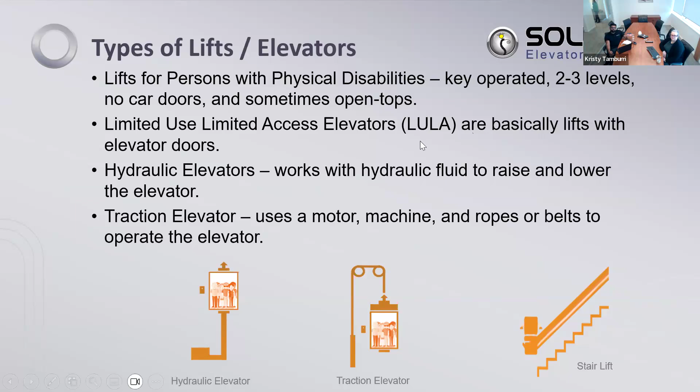The normal way we distinguish between the main types of elevators is passenger and freight. I know that probably in your buildings people use passenger elevators as freight elevators, but they're mainly supposed to be for passengers. Freight elevators you'll usually find in commercial buildings for moving deliveries, and they're not supposed to be for public use. Maybe one person in there for garbage and things like that.

One point I wanted to bring up is that for users and strata members, a lot of the time we have issues when people are moving in and moving out. You can ask your elevator contractor to provide some information, training, and keys to use the elevator on independent service. There's a key switch inside the car which allows you to take control of the elevator, rather than holding or propping the doors open. That's often an issue that causes callbacks and can shut the elevator down.

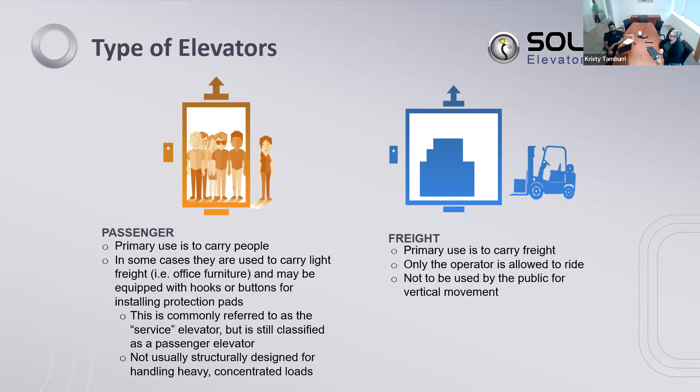In one of my last jobs, we reviewed all of our callbacks, and in Bermuda, 70% of our callbacks were related to doors. That can be down to wear and tear and the age of the equipment, but it is a part of the elevator which is subject to user interference and misuse. If there are ways to minimize these types of callbacks, it benefits everybody. So I think that's really important.

I feel like this is quite important because there are a lot of elevators coming to that age of modernization now, and with the type of applications and buildings that you have here, it will mainly be hydraulic elevators that you have. So this is important. I hope you enjoyed that nice animation.

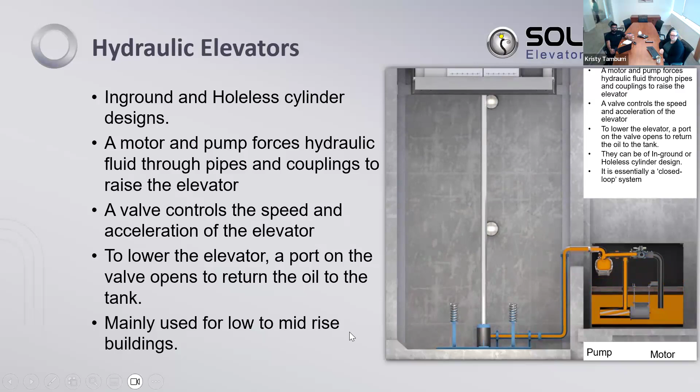Controllers. And this isn't just specific to a hydraulic elevator; we need one for all elevators, and the controller basically processes calls. It controls speeds, and you can adjust everything on there, and it monitors the safety circuit, so doors, door openings, safety circuits, and all of the switches, and keeps track of where the elevator is in the hoistway.

One point I wanted to bring up here is proprietary equipment versus non-proprietary equipment. This is really important to us as elevator consultants, because when you have proprietary equipment, not just controller equipment in general, it means that the software, the spare parts, and the equipment can only be sourced from one supplier. So it can become difficult when you're planning to modernize, or you have a breakdown and you need to get parts, and it can even tie you down to one provider.

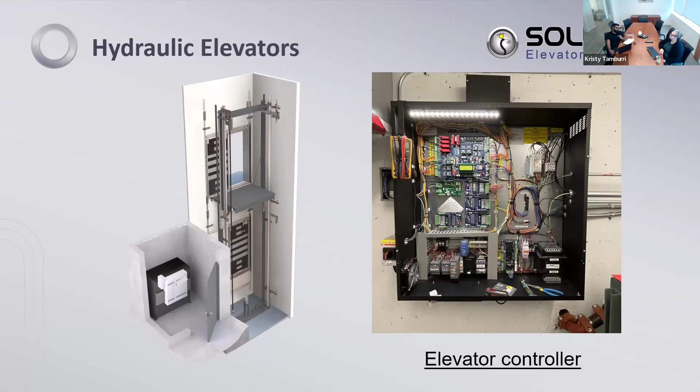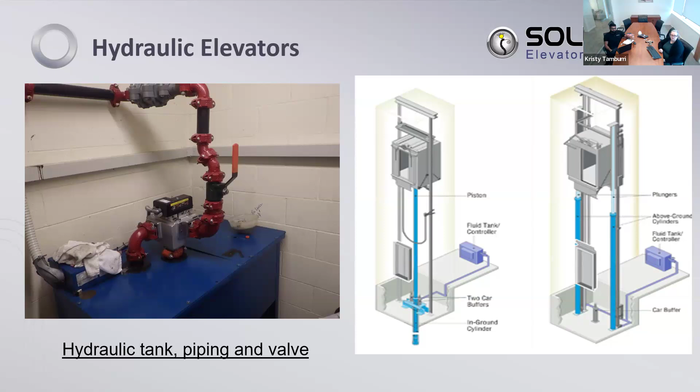Okay, done on elevator controllers. This is another nice photo of an elevator tank. Usually the power unit will be inside of there to pump the oil. And then on the right, we have a nice diagram again to show how the hydraulic elevator works and the in-ground cylinder. Something to be aware of is that oil leaks can be big issues, especially with aging hydraulic elevators. As you can see from the diagram on the right-hand side, there are lots of areas where oil can leak from. So I guess that's important to you guys, and that's pretty much all to say on this slide.

And then this is the cylinder. On the right-hand side, you can see how it's protected and it's in the ground there. They should have PVC casing to protect it. And that's the piston, obviously, that raises and lowers the car.

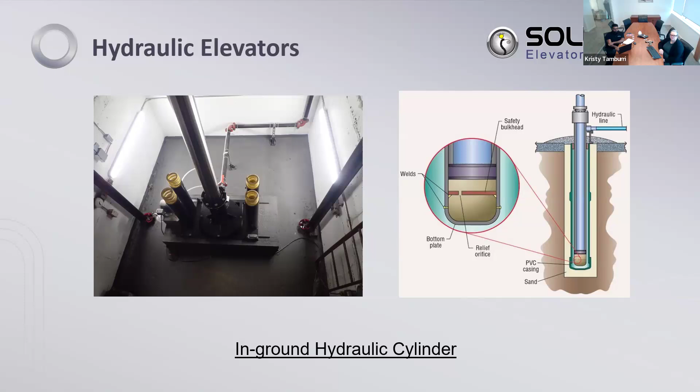Okay, now moving on to traction elevators. In comparison to hydraulic elevators, they're used for mid and high-rise applications. These are the three main versions: geared machines, gearless machines, and machine roomless applications, which have come in the last 25 years. Machine roomless, I'm not sure if anyone would have seen them before. It means, obviously from the name, that you don't need a machine room. Everything's in the hoistway for you.

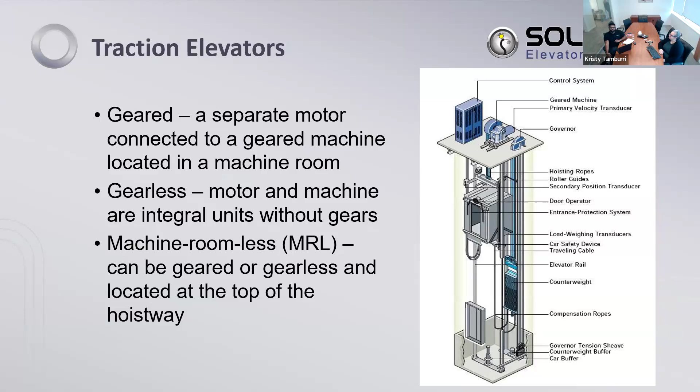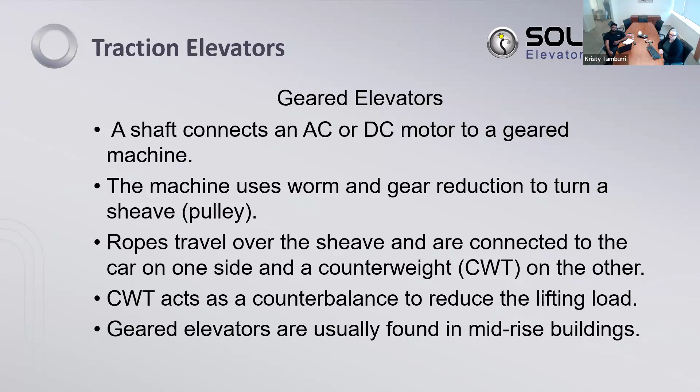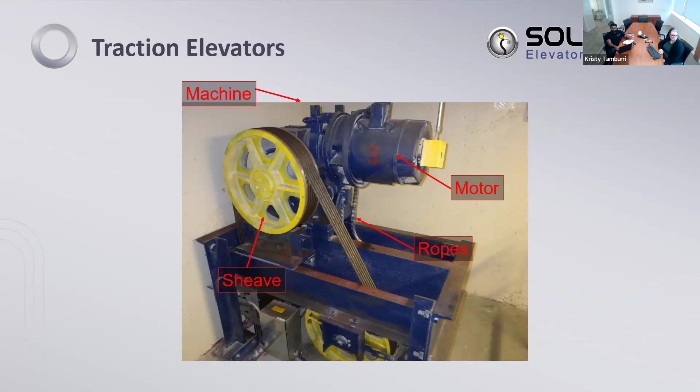This is a photo of a geared machine. And although it looks pretty simple, the type and manufacturer and components can affect how serviceable and upgradable the system is. So this is probably the simplest depiction of this machine. And a couple more lovely photos.

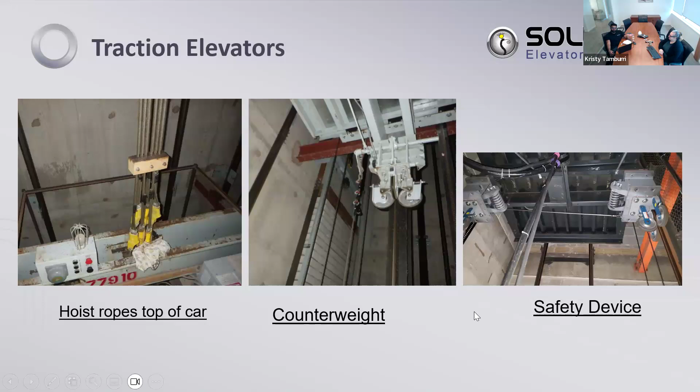So for gearless applications, the shaft connects to the motor directly. Ropes travel over the sheave and they're connected to the car on one side and the counterweight on the other. So it's same as the geared application. In this case, it's used in higher speed, higher rise applications, and the gearless elevators are more expensive, but they're smoother in ride. The ride quality is better. They're more efficient, energy wise as well. So it's a bigger initial investment, but for long term, they are better.

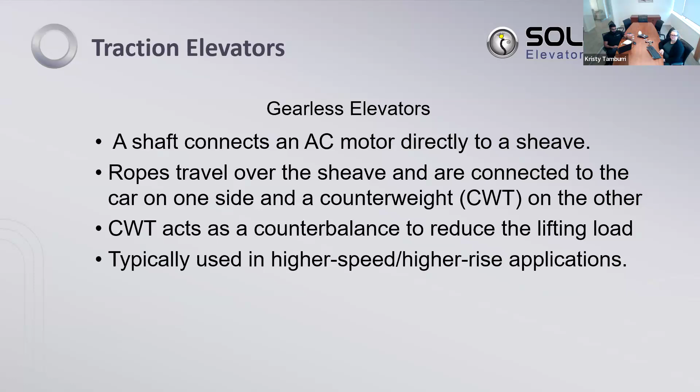But I'm not sure if that would really apply too heavily to the island, but just a bit of information. And actually, I was trying to get some photos because when I was in London, I worked on some huge gearless elevators at Canary Wharf, and I was trying to get a photo from my friend, but I was unable to. So these are just other gearless elevators that I haven't worked on, unfortunately. But there you go.

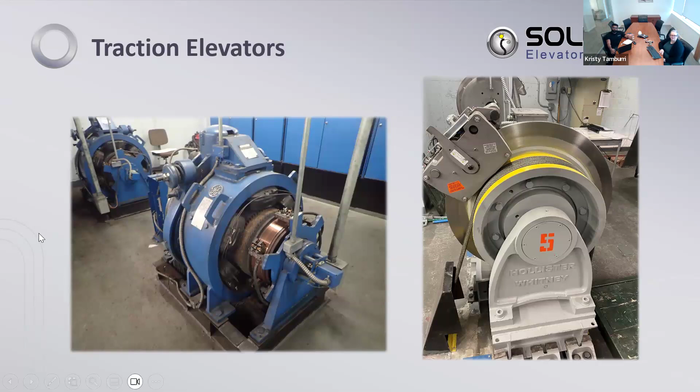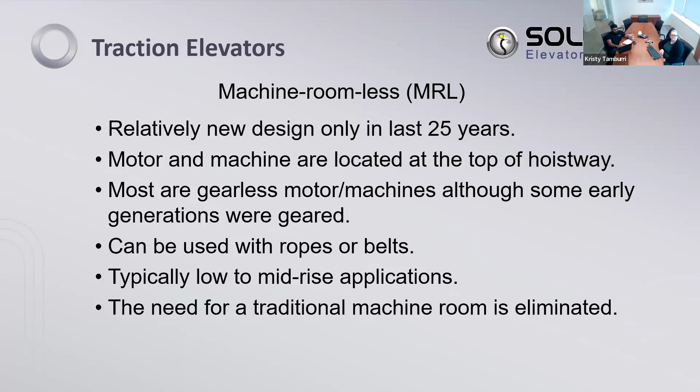And then machine roomless. There'll probably be some machine roomless elevators here on the island. Actually, I'll show you the photo while I talk. So here, as you can see, they're pretty new. It's around 25 years since the industry started putting in machine roomless elevators. The machine is in the top of the hoistway. Most of them are gearless, although some early generations were geared, and they can use ropes or, in this photo, belts. So there are belts that drive and are attached to the elevator car.

So these are used for low to mid-rise buildings, and it's a good space saver because it eliminates the need for a machine room. Architects like it, so they can have more space for everything else. It does come with some complications because they're really difficult for repair and maintenance work. If you have an issue with the machine and the elevator is at the bottom of the hoistway, and even working on them, if there are issues with the motor, it's difficult to repair them. So repairs can be costly. Downtime can be increased as well. So that's something to bear in mind.

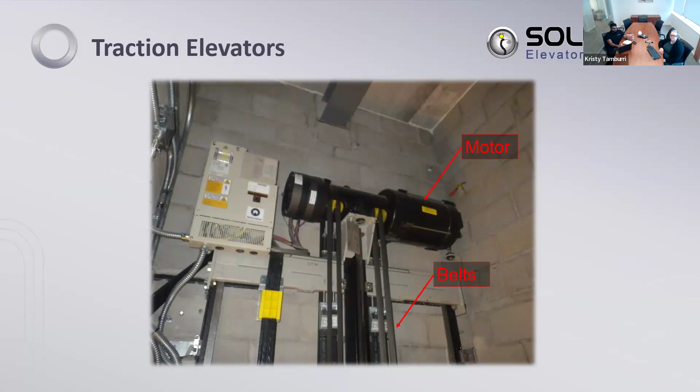Obviously, if you're in a building with a machine roomless elevator, it's difficult to change now. So you have to deal with what you've got, but it's something to bear in mind for maybe newer buildings. Just a couple more photos. Don't really have too much to say here. These are all different machine roomless applications again. This one's an Otis. This is Otis as well, I'm pretty sure.

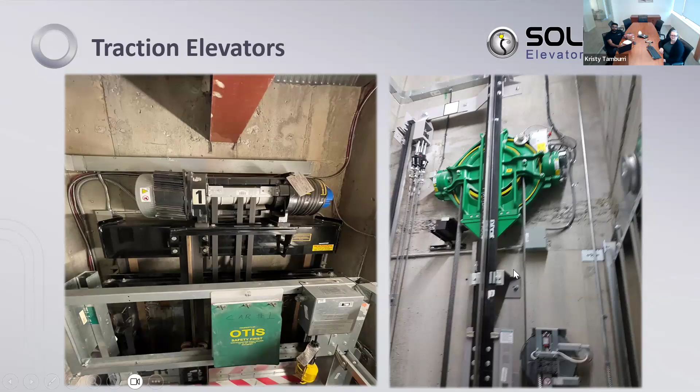Okay, a little bit of information about the TSBC. You should all probably know them. They oversee all the elevators, licensing, regulations, and they carry out the inspections on your elevators. If you have any issues or accidents, it's your responsibility to report to them, and allow them to come and investigate and give their opinion on what needs to be done.

So we often deal with them with modernisation projects because before we carry out our final inspection, they'll review the elevator. It's different because they'll review mainly the safety aspects of an elevator, whereas Solucore, as the consultant working for the building, we review the safety elements afterwards. But we're also ensuring that all the finishing is done and all the other items not related to safety have been installed as we've asked for it. So TSBC are the real bosses around here.

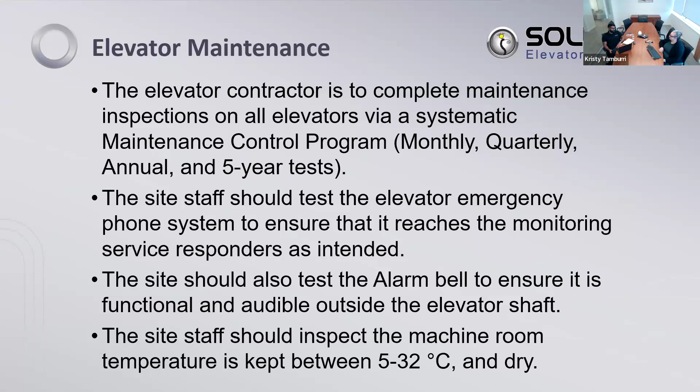A little bit more information about other inspections and testing that's required. Aside from the monthly regular maintenance visits from your elevator contractor, there's category 1 testing, which is carried out once a year, and the TSBC can issue an order to shut down the elevator if you haven't done these. These are testing of the safety devices that I was speaking about earlier.

And then the category 5 testing is a more intense test, every 5 years, and that will be full load testing, full speed testing, just to ensure that the elevator can stop and is safe at these full speeds. So be aware of that, because a lot of the time with property managers, stratas and stuff, it might come up as an unexpected cost that you haven't budgeted for.

That category 1 test is required every year. If you're working with Solucore, we can send out automated reminders to let you know in advance. But if you're not dealing with Solucore, it'd be good to know when it's coming up, just so you're not surprised with any unexpected costs.

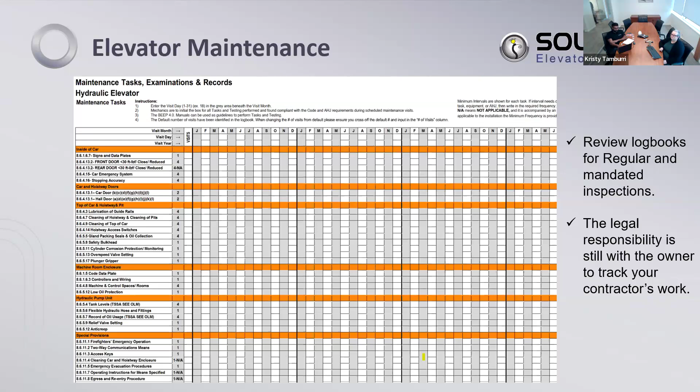Just a little bit of information here on fire testing. This will be tested monthly, and it has a key switch. You might be familiar with these in the lobby area to test a fire recall. In some buildings they'll be connected to your fire panel. So the elevator will come to the lobby with the doors open so that people aren't able to use the elevators, but the fire service will be able to. So that's another important thing for buildings to be aware of and ensure that they're tested.

And I think the next one, it's just a checklist here. So this is sort of a generic table of what should be checked in these fire testings.

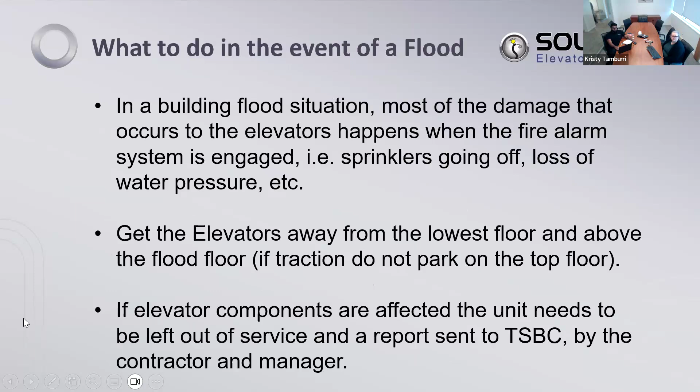Okay, some little facts. The traction elevator is more likely to fall up, not down, because of the counterweight being heavier. Elevators are statistically the safest way to travel. The world's population travels in an elevator more every 3 days. More elevators are installed in China annually than are in service in the province of Ontario, and North America has 1.5 million elevators. An elevator technician is the most likely person to be injured on an elevator.

Yeah, that makes sense. And the world's tallest test tower is in an abandoned mine in Finland. Huh, who knew? I hope everyone's excited about these elevator facts.

So now a little bit of information on how we can help. So we do maintenance agreements. As you probably know, having a maintenance agreement on an elevator contractor's paper has a lot of terms and clauses that support them rather than you. And there's a lot of vague wording. So basically we'll put together a contract with terms and clauses that protect the building.

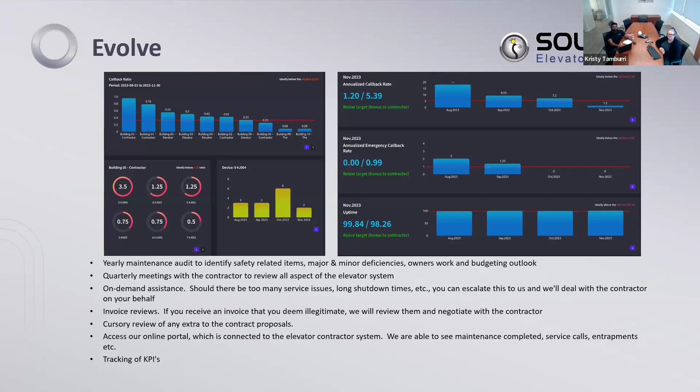So like I said, with the Cat 1 testing and Cat 5 testing, you'll get an automated email from our system. With callbacks, if there's a callback on the same elevator more than 3 times in a month, you'll get an automatic email. So that will go to the contractor as well, and that will remind them that this is now becoming a problem, and they need to act on it. So effectively, it's like you have a consultant 24/7, even when me and Richard are sleeping. Yeah, I think the regular meetings are really important in pushing the elevator contractor to make sure that they're doing what we expect of them. So yeah, that's it from me.

Oh boy, okay. Are counterweights up to 1.5 times the weight of the empty car or fully loaded car? Empty car, yeah. So that when people get in the car, they balance out.

Perfect. Okay, so here's a two-parter. A few months ago, the elevator would not come to any floors. All 3 outside doors were closed. There was no answer to the phone number on the control box in the garage. Luckily, the site sweeper was able to suggest rebooting the system. There was a button on the side of the control box. It needed to be pressed a few times over 10 minutes. There was a clunk and everything worked. Any thoughts on why?

It sounds like maybe the governor or a safety was engaged. They sometimes have a reset button on the side of the controller, but the clunk might be the brake dropping out. But I would definitely advise to get your contractor in to review that, because just resetting something is not great.